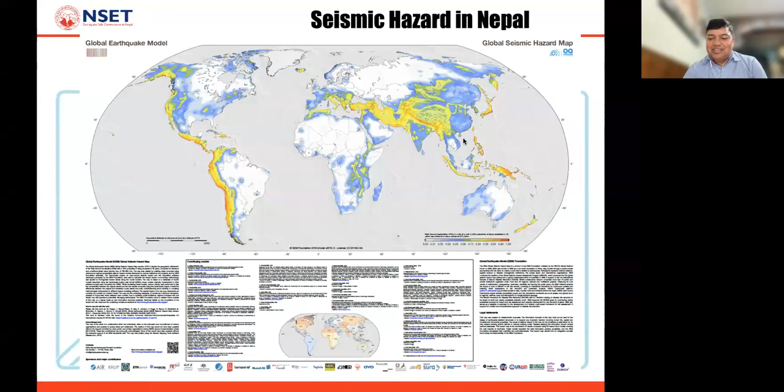We have our own seismic hazard map also, that's for most of the country. It's a 10% probability of exceedance in 50 years, about 0.4 G for most of the urbanized area. So that's the seismic hazard in Nepal.

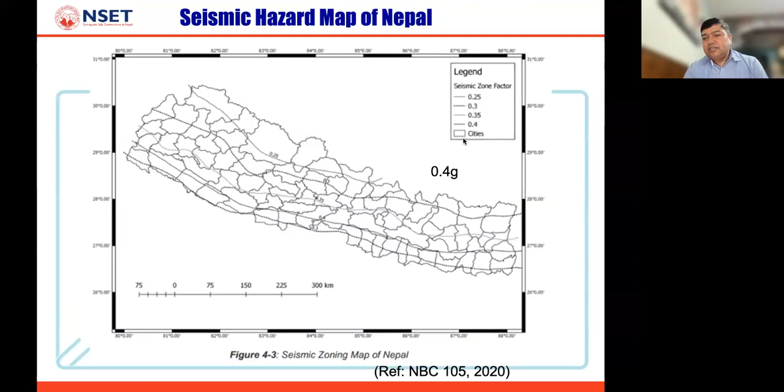This is also a known fact that globally during earthquakes, most of the people get killed because of buildings collapsing. This is the global scenario from the Earthquake Protection Handbook. Out of about 1.4 million fatalities, about 900,000 people were killed just because of masonry buildings. If we combine all other buildings, then it comes up to more than 80% of the people killed, and that's even more in developing countries.

For example, in the Gorkha earthquake, we thought almost similarly, that about 80% of the people may get killed because of building collapse, and the remaining about 20% may get killed because of lack of emergency response or others. But the reality we found was about 99% of people got killed because of either buildings or infrastructure collapse, and it's mostly the buildings.

And these data of 1.4 million do not include the Bhuj earthquake, Kashmir earthquake, Iran or Gorkha earthquake - the new earthquakes after 2000. But still, if we sum up all this, the ratio becomes even more, because most people are still getting killed because of the collapse of masonry buildings or other buildings.

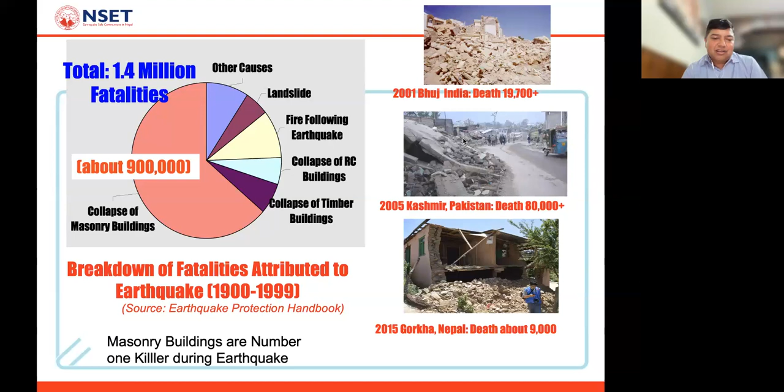So in that context, in Nepal, from NSET's side, we are working in all three streams actually. One is, and the easiest one, to make all new buildings earthquake resistant. That's the most easiest one, and the cost effective one.

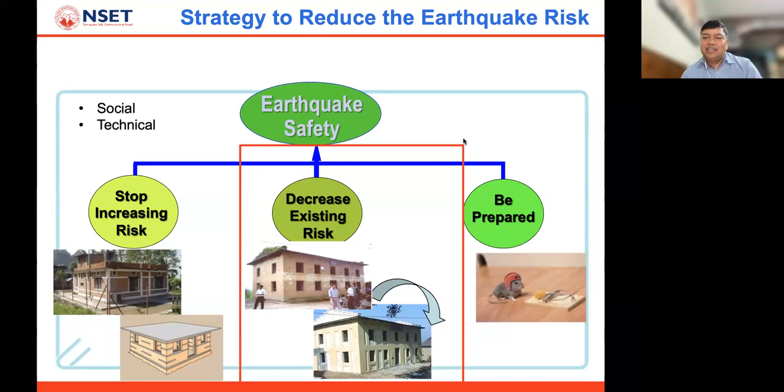We do have programs to support building code implementation, many awareness-raising programs and others for making new buildings safer. But we already have so many millions of existing buildings, and most of them are vulnerable.

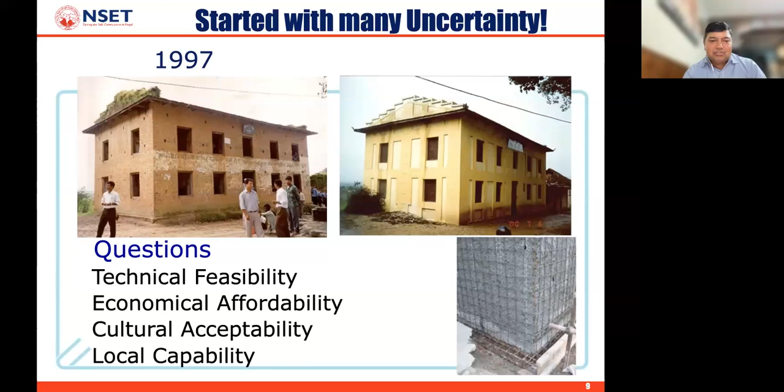So there were many questions for us, and we started with this simple school. We found some literature, some methods, and tried that. Perhaps we did slightly more than what was required at that time. But we tried, as you can see in the right, left corner of the building, a simple micro-concreting with some small rebar mesh. That's the type of retrofit we chose, and we did this retrofitting work.

And then during the retrofitting process, because this was new in our communities, the working masons asked, okay, why are we doing this? This is for the existing building, and you are breaking some part, adding some elements - what's the reason? We thought that without helping them understand why we're doing this, they will not do it properly. Only telling them to do this or that work may not help.

So we started training local craftspersons, the masons, even in retrofit and earthquake-resistant construction and others. This masons training that started from this retrofitting program became so famous that we developed a curricula. After the 2015 Gorkha earthquake, about 70,000 masons were trained, not only by NSET but by all organizations, based on the curricula that we developed.

And this came from these questions from the masons originally when we were retrofitting. When they were convinced, they thought they knew the technique and understood its importance, but they felt: why don't we from NSET convince the parents about the importance of retrofitting, so that they can support and help, because they know the technique.

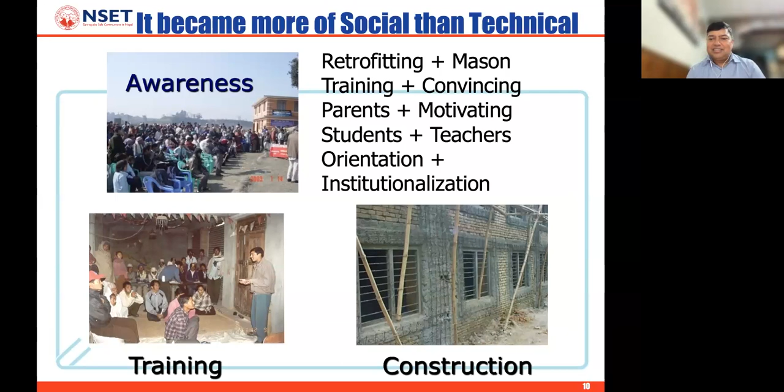And this is how we started our retrofitting work in Nepal. It became a comprehensive program with good stakeholder engagement, primarily three parts: awareness raising, knowledge sharing and training, and then the construction part. So this is how it started.

Before the Gorkha earthquake, we had retrofitted about 260 school buildings throughout Nepal with different fundings, raised from organizations like USAID, UNICEF, Plan, and other NGOs. NSET was directly involved in retrofitting these 260 school buildings prior to the Gorkha earthquake, and many of those buildings were in the highly earthquake-affected area around Kathmandu.

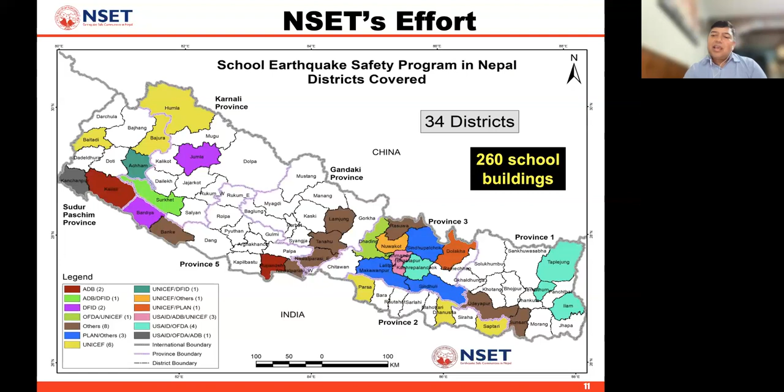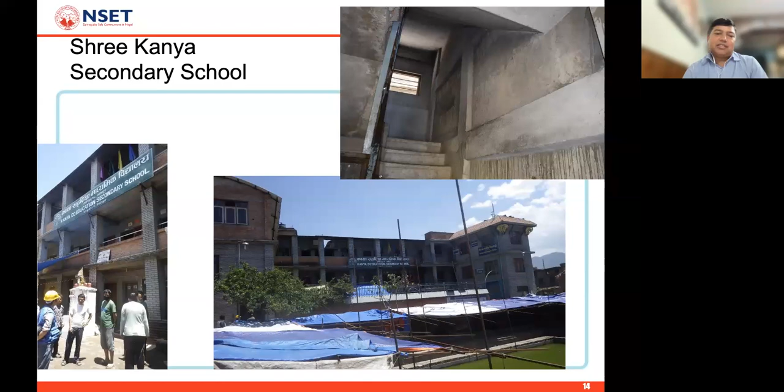Some of these schools were even still under retrofitting during 2015. We had a program at that time to retrofit 50 schools a year with the Department of Education, and while we were retrofitting, the earthquake happened. Some schools were near finishing retrofit, and they still performed quite well even with unfinished work.

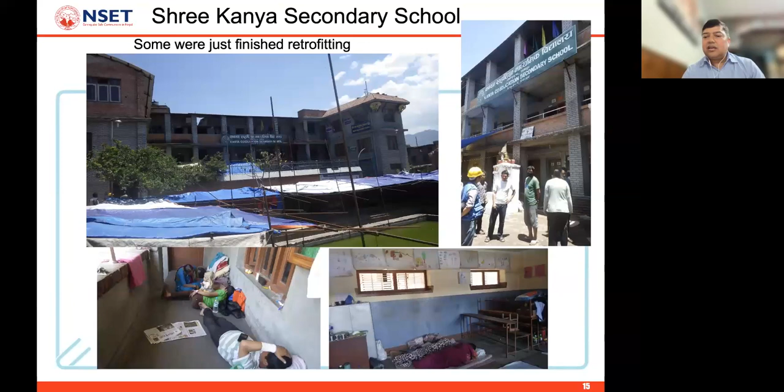In our approach we engage communities from the beginning to raise awareness, and we knew there were many better or even more resilient residential buildings in the communities, but none of the communities had trust in their own buildings. They came to the schools because they were meant for earthquake safety and had been retrofitted, so people had more faith in them and stayed there for some time. We knew their own houses might have sometimes been even better, but still they trusted the schools more because of this community-based engagement approach.

The first school we retrofitted, the one I showed earlier, was also our starting point. We went to see that school again, and since it had already been 18 years since implementation when the earthquake hit, nothing happened - no cracks, the school was perfect. We visited all of those retrofitted schools, mostly 2 to 3 stories, and you can see different schools in different colors, but all performed very well.

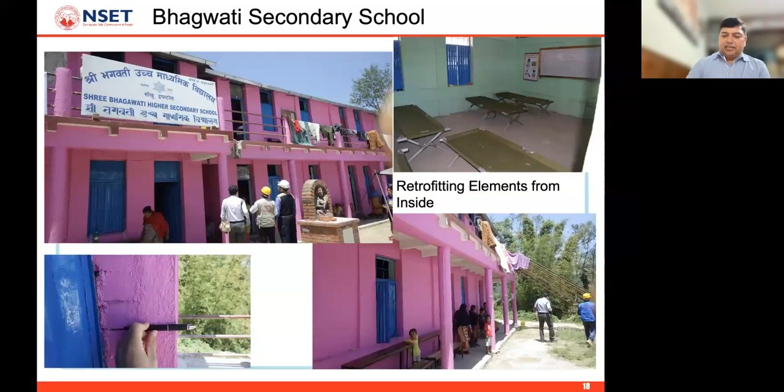That's the point - there are some cases where we did not retrofit all the school blocks of the same school, because we had limited buildings to retrofit. So there are many cases where the retrofitted buildings did not even get cracked, while others which were not retrofitted - sometimes even reinforced concrete buildings with small concrete columns - completely collapsed or were severely damaged, even within the same compound. This is one example in the north of Kathmandu Valley, Bhagyodaya School.

On the left side, you can see the pink block - it's actually a U-shaped block, quite large, a brick and mud building that we retrofitted prior to the earthquake, and it sustained quite well, with no cracks, and was used as an emergency shelter after the earthquake. On the right side, you see the same pink block again, and another block, 4 stories, a reinforced concrete school building, a larger block, that was severely damaged and needed to be demolished and reconstructed.

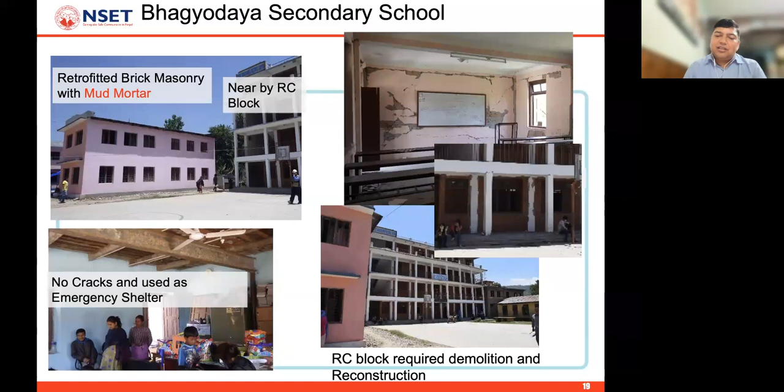All the retrofitted school buildings performed well, but more than 6,000 schools collapsed in the 2015 earthquake in the same area. So that shows very clearly the retrofitting worked very well.

The retrofitting techniques we use are simple retrofitting techniques. The first one is what we call splint and bandage. We coined this name from medical terminology. The splints are the vertical elements - when a hand is fractured, you put the splint, and then the bandage. So to have similar terminology, we term this splint and bandage, and in our guidelines and standards, this terminology is now used.

It just means you have vertical and horizontal elements - horizontal and vertical bands from outside and inside of the building walls, connected together. On the left you can see the rebars going in, and on the right we use micro concrete and plaster after that. So these are the horizontal and vertical bands connected from inside and outside - this is what we call splint and bandage.

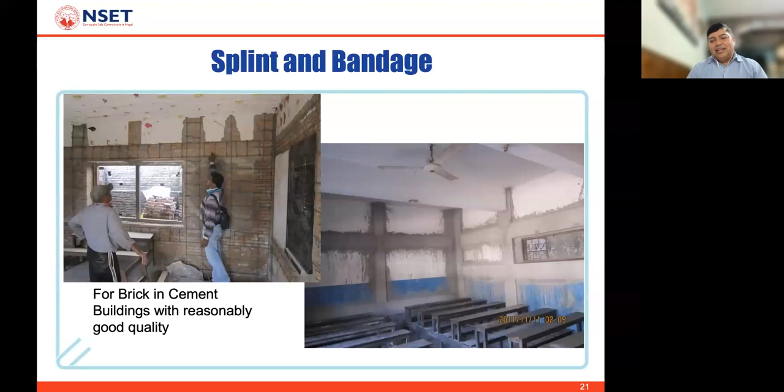This type of retrofitting technique we use for many schools which are cement-based, up to 2 stories mostly, and in relatively good quality condition. For other schools which are relatively bad quality masonry work, or 3 stories - depending again on our calculation as an engineer, depending on the demand - the other retrofitting technique we used was complete jacketing of the walls, again with reinforcement and micro concrete.

We generally use manual shotcreting, simple. The concrete is designed mostly for cover, and also very little shear - most of the requirement is fulfilled by the reinforcement we put. So this is how we design and implement reinforced concrete jacketing - a thin layer of concrete with reinforcement.

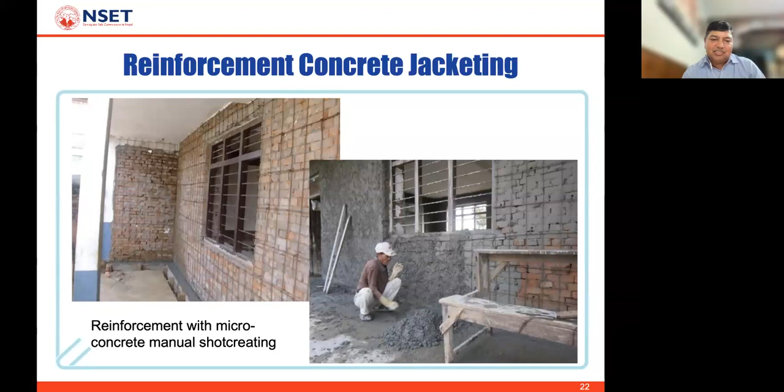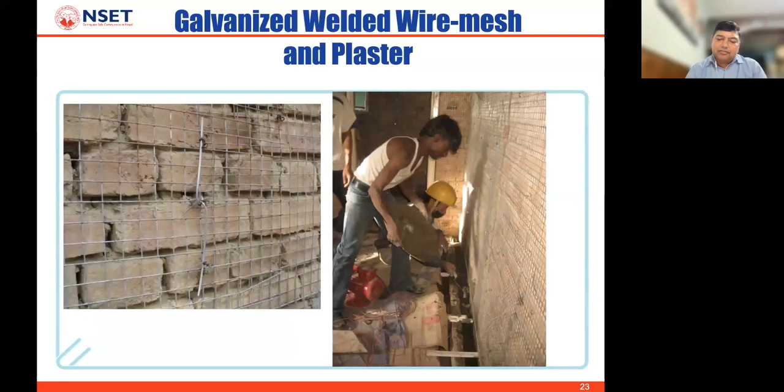In some cases, considering the space and to implement it fast, especially in residential buildings, we use welded galvanized wire mesh, so we don't need a thicker concrete layer - this thin plaster will work, and being galvanized, there's minimal problem of rusting. We used this in many buildings to retrofit, including some schools and mostly residential buildings.

We used polypropylene mesh jacketing also, especially for 1-story small mud-based adobe or brick and mud buildings. That's based on research at the University of Tokyo, which we did in 2008, 2009 in some buildings, and they also performed quite well in 2015.

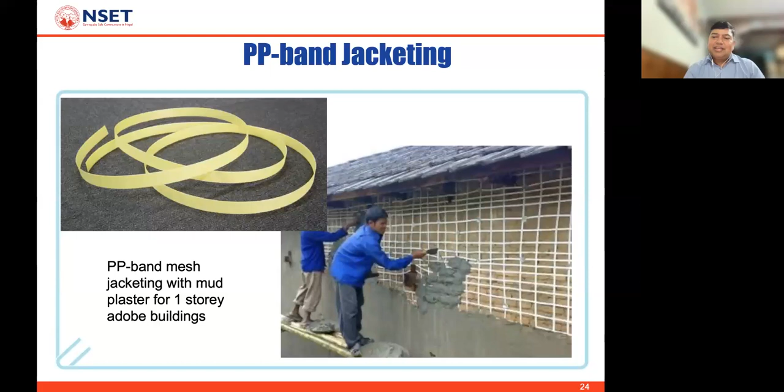The PP band is the material generally used for packing, and we prepare the mesh from it. Sunlight affects this material a lot because it's plastic-based, so we have to cover it. But if there's proper coverage, it's good because it doesn't get damaged by water. So it's a good material - very light, very cheap - and we use it in some buildings too.

We have combinations as well. We use this material because it's cheap and light, alongside splint and bandage. But in some cases it's not enough, especially to prevent local failure, so we have other methods of mixing these. In critical locations - above the window or at lintel level or sill level, corners, near doors, those high stress or stress concentration places - we put slightly stronger material similar to splint and bandage, and in all remaining places we use the polypropylene band.

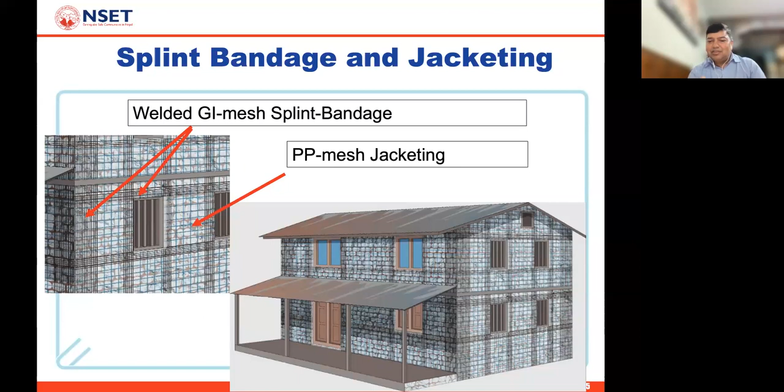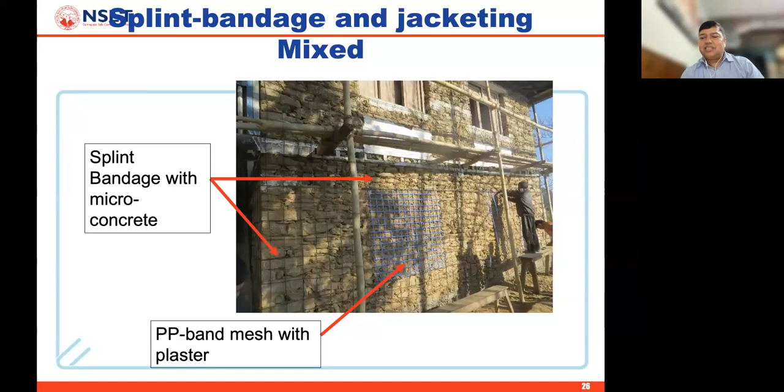We've done this, for example, as you can see in the picture - in areas with less stress concentration, you can use low strength materials. In some cases we even have welded strong mesh near openings or corners, and in other cases widely spaced GI wires instead of the PP band.

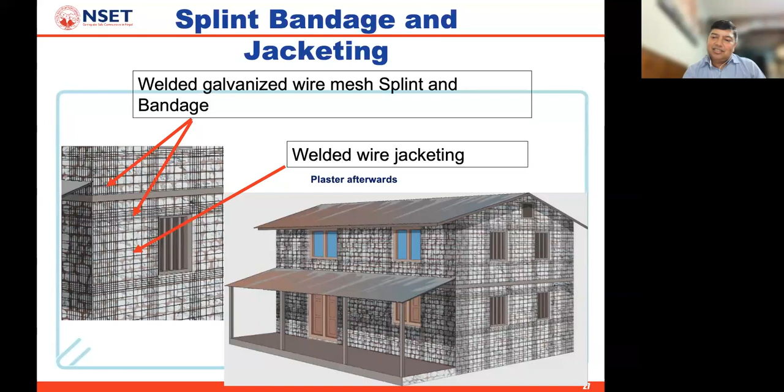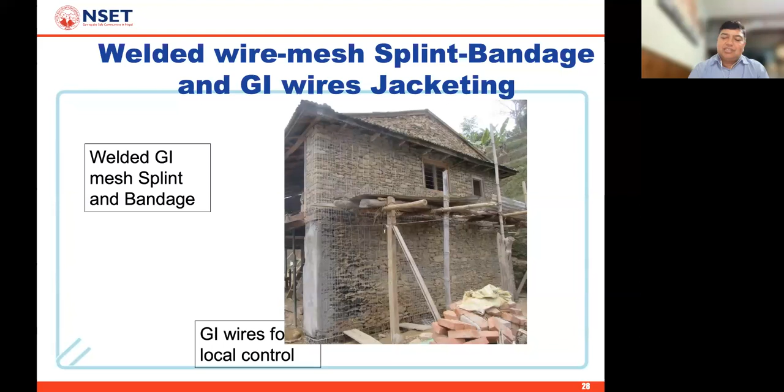So we have different combinations of jacketing and these methods. For example, here you can see just below the window, at the corners and the middle part, the closed mesh - stronger welded wire mesh - and in other areas the wider spaced GI wires. So we have a combination of these methods as well.

So these are the retrofitting techniques that we used. In terms of the research, we have both the experiments as well as the numerical simulations. Our research has been done mostly in collaboration with universities in Nepal and outside Nepal. NSET is not a completely research organization, so we are more implementation oriented, but we work as a very strong link between the research and the implementation.

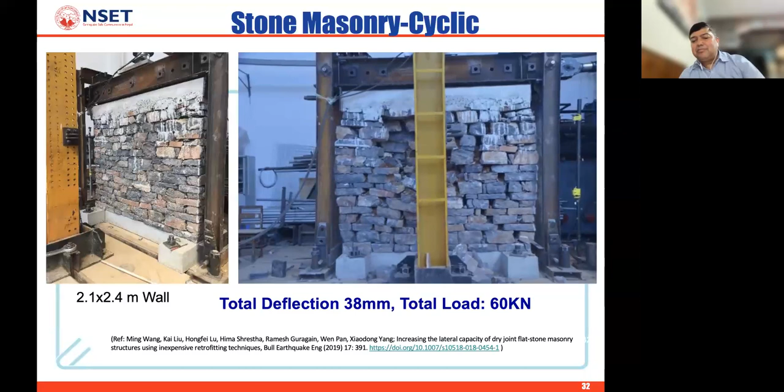In the non-retrofitted case, the total deflection was a maximum of 38 millimeters, and the total maximum peak load was 60 kilonewtons, for a relatively good, well-laid stone wall. In the retrofitted case, the deflection was 185, and the load was 147, so almost 5 times more deflection capacity and at least 2.5 times more load resisting capacity. So it's quite significant safety improvement.

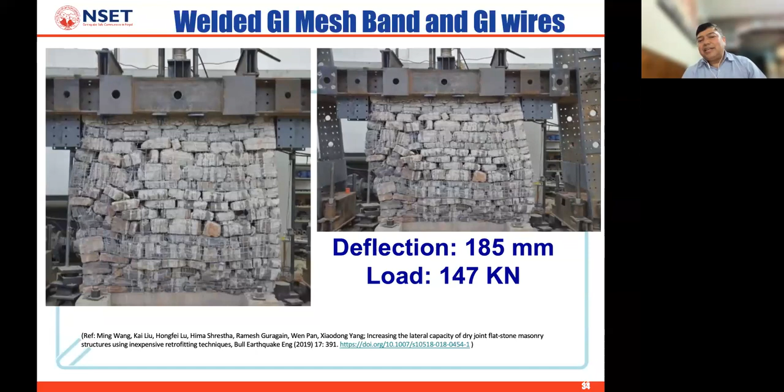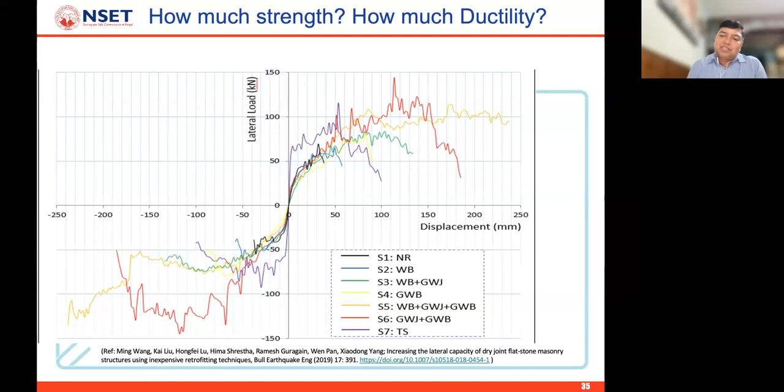But these are still at the element level. Later on, these are the comparisons you can see here. The black line is the non-retrofitted one, and the red one is the highest performance one, with the galvanized wire mesh jacketing. After the element level tests, we also conducted shake table tests for almost full scale buildings, about two-thirds scale.

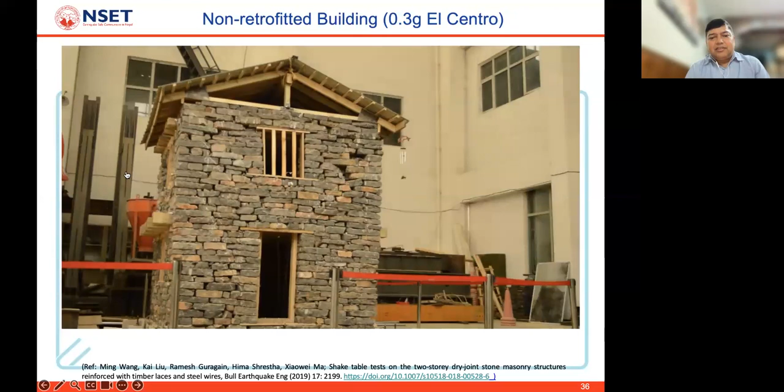It was a 0.3G El Centro test, and the non-retrofitted building collapsed at that stage, so we stopped further testing of that block. Then we had another building, starting from 0.05, 0.1, 0.15, 0.2 G, and we continued that test up to 1G, which was the maximum capacity of the shake table.

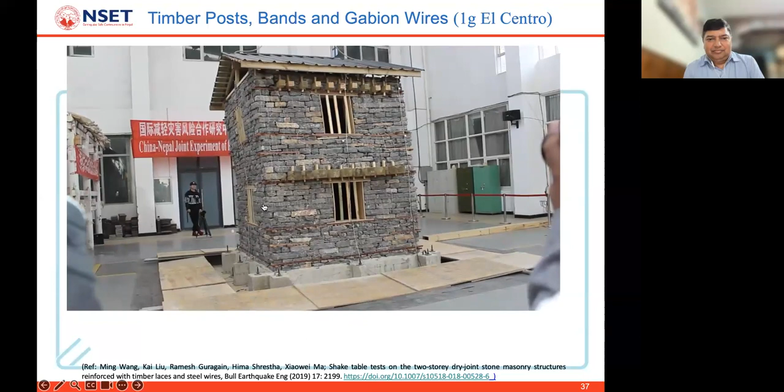We could test up to 0.8G, and at 1G we could not even completely test because the shake table stopped. But going from 0.1G up to 0.8G and even close to 1G was quite significant, and there were some deflections of the building. You can see even the shape changed, but none of the stones fell down, and the building remained intact even at that level, almost 3 times better in comparison to the non-retrofitted building.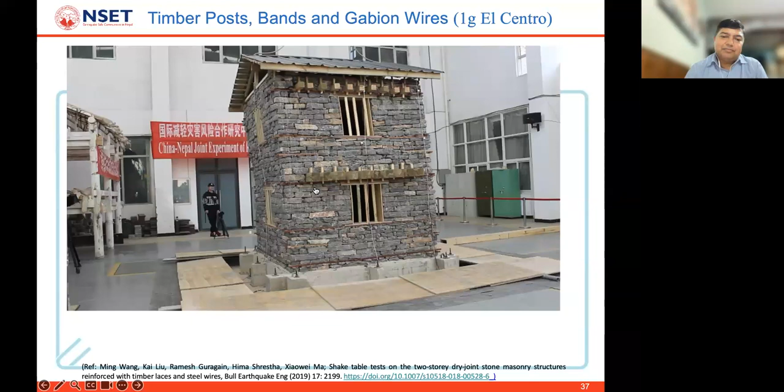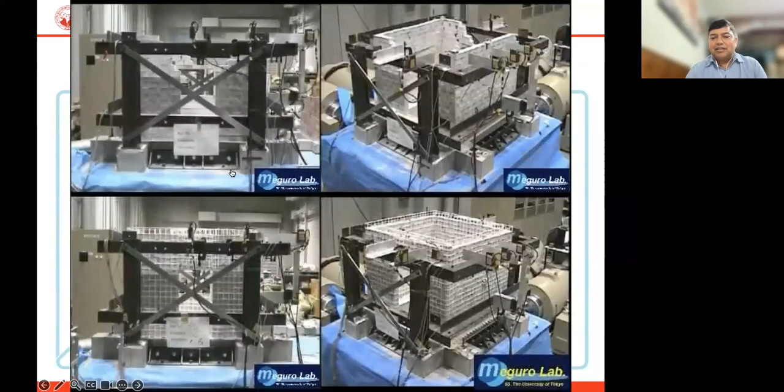So that's the type of research we got involved in, based on the real problems we were facing and the type of retrofitting techniques we use here in Nepal, and at least some of them we tested. For the PP band retrofitting technique, it's mostly University of Tokyo work - I graduated from there, and it was part of my master's and also some of my PhD work.

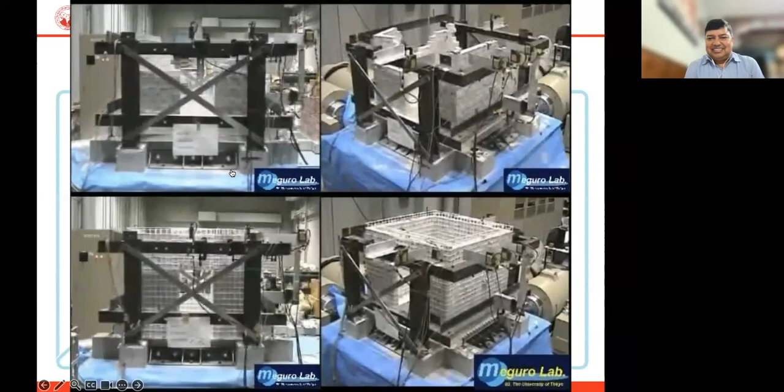This is still a small scale, 1:4 scale test, just for comparison, and more for numerical purposes - to develop the numerical simulations and verify the numerical work. So those tests are used for that purpose.

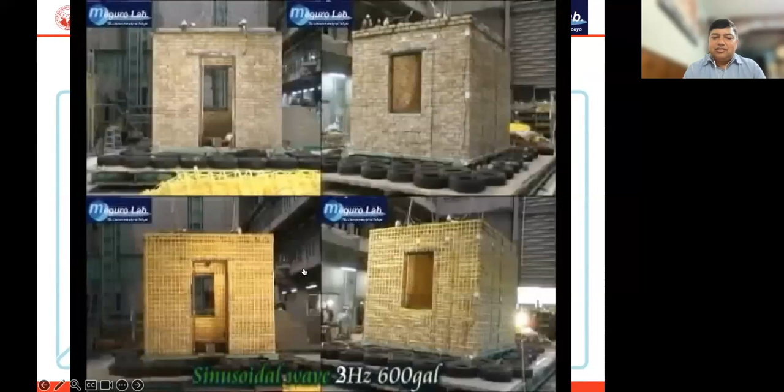But at the same time, we have full scale shake table tests also - you can see here it was a sinusoidal wave, 3 hertz, 600 gal, retrofitted by polypropylene band. It's just a 1-story full scale model.

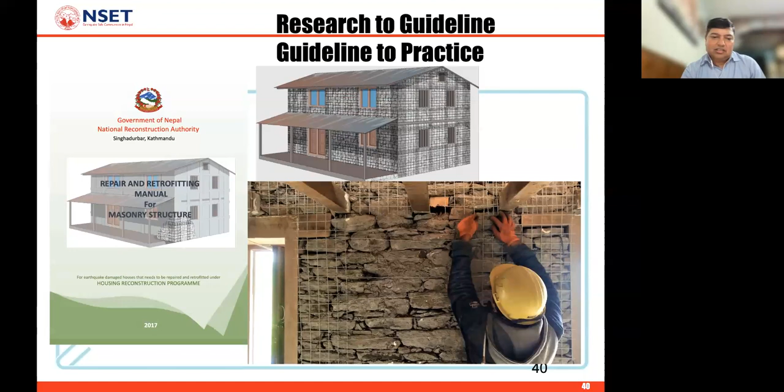That's the level of work we've been doing in that line. In terms of stakeholder engagement, that's again very critical. Without proper engagement, it's very difficult to promote retrofit, and it requires a lot of information because there are so many stakeholders. They actually influence the house owner, who is at the core of deciding on retrofit, for example in residential buildings. Friends and family are the nearest influence for any decision making, including retrofit.

We have local masons, because they generally support construction of houses in most parts of the country. We have engineers and consultants, vendors, material producers, academic and research institutions to do the research. We have local governments, local communities, and municipal engineers as another group that influences this. We have the central and provincial governments to formulate guidelines and policies. We have other partner organizations, donors for funding, CSOs and CBOs for advocacy, and others. We also have media playing a role. So there are many stakeholders who are involved and whose involvement is required to promote retrofit.

That's why we need a very comprehensive program to include all of them, so the concept can move forward. Especially for any new concept in society, we have to get all these players or stakeholders involved. We learned this from our building code implementation program earlier — considering all these stakeholders, we ultimately identified three types, or three actions required.

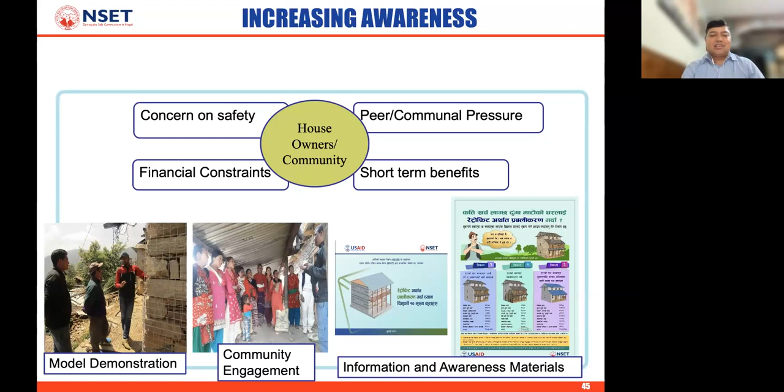For capacity strengthening for the masons and contractors, again we have to give hands-on training.

For retrofit, what we found was combining discussions in classes at a more conceptual level, explaining why it's so important to do it that way, together with on-site help so they understand what to do and how to do it. Both of these are very important.

Unless they do it, they don't know what to do. But if we just focus on what to do only on-site, they may not know the reason why we are doing this. Unless they know the answer for why we're doing it this way, they may forget, and next time there's a huge chance they'll make a mistake.

So for engineers and for masons too, we combined theoretical trainings with field observations, on-site hands-on exercises and skills.

Our retrofitting training for masons goes for almost a month, starting from a whole building's foundation to roof. It's part of the real retrofit work, complemented by theoretical sessions, classroom discussions, problem sharing and others, so they know the skills and also know the reasons why we do it that way.

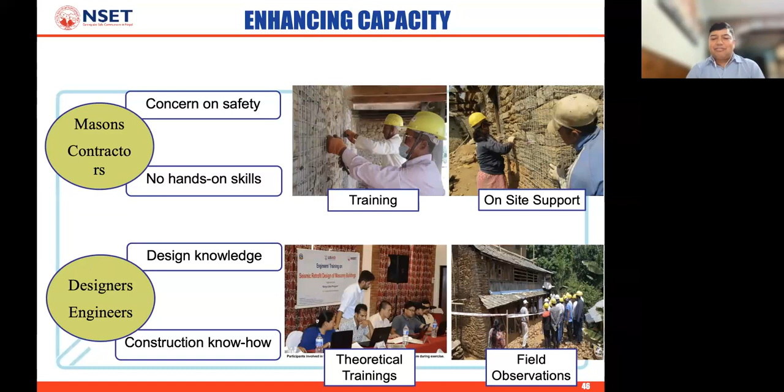For engineers, there's a slightly heavier part on discussions, the design process, and seismic retrofit design of masonry buildings and similar topics. But at the same time, field observations were really important to build confidence.

For institutionalization, we had to have guidelines. They are very important, consensus guidelines mostly, and it required a lot of workshops, discussions, and again demonstrations.

Combining all these activities, we could come up with national level guidelines and manuals, but at the same time put an institutional process in place for how they will give the permit for retrofit and who will check the quality of those works and others.

So this is how we did stakeholder engagement for the three different streams of stakeholders.

Now let's come to the cost of retrofitting. Again it depends on which retrofitting technique we use. For this welded galvanized iron mesh and GI wire jacketing type of work, it's Nepali rupees 450 to 500 per square feet. That's how much - 130 Nepali rupees is $1.

So that's $4 or $5 per square feet of the plinth area. Starting from that, for a 200 square feet one-story small house, it costs about 850 US dollars, and bigger ones around 1400 plus 50.

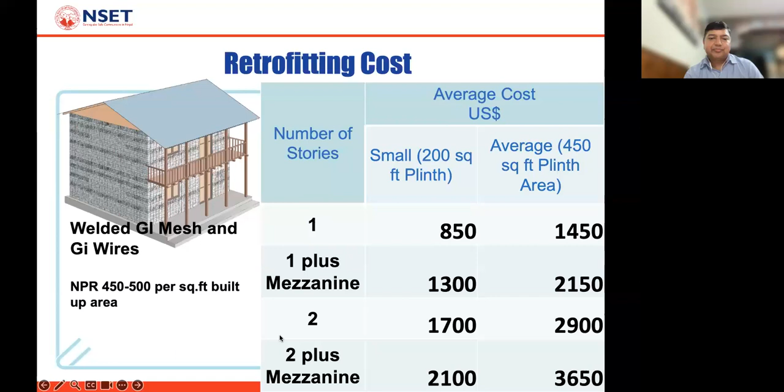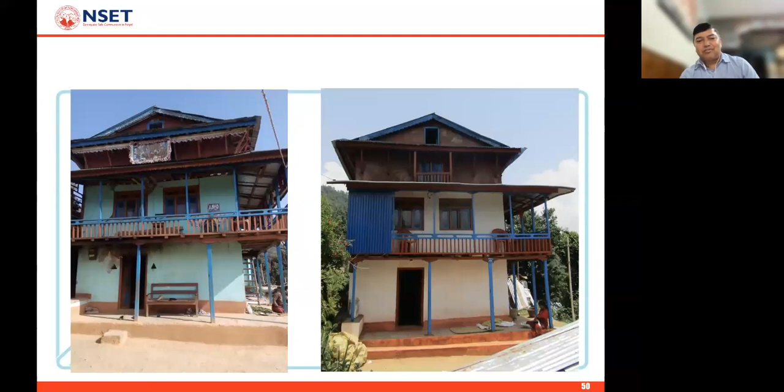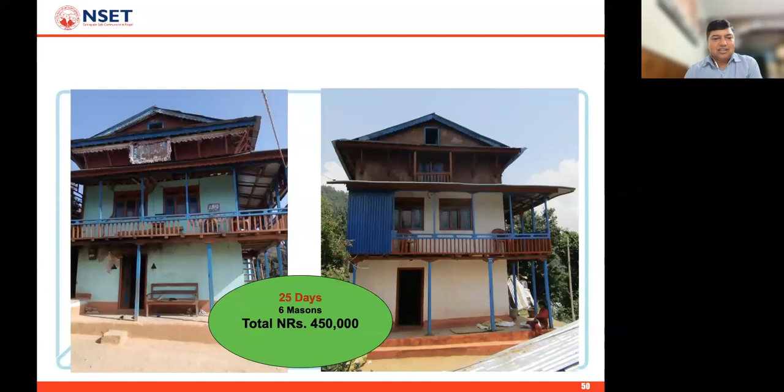This is an average of those 100 plus buildings that we retrofitted, using today's cost rate. For example, this is a real building we retrofitted — on the left before retrofit, right after retrofit. For this one, it cost about 450,000 Nepali rupees, which divided by 130 is about 4,000 US dollars.

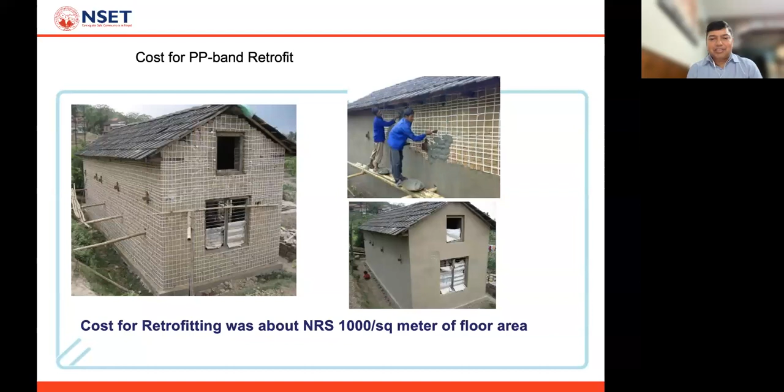The PP band is much cheaper, about 1,000 per square meter, meaning 100 per square foot, less than $1 per square foot of plinth area. The material itself costs less than $100 total for this type of building. That's the cost for the PP band retrofit.

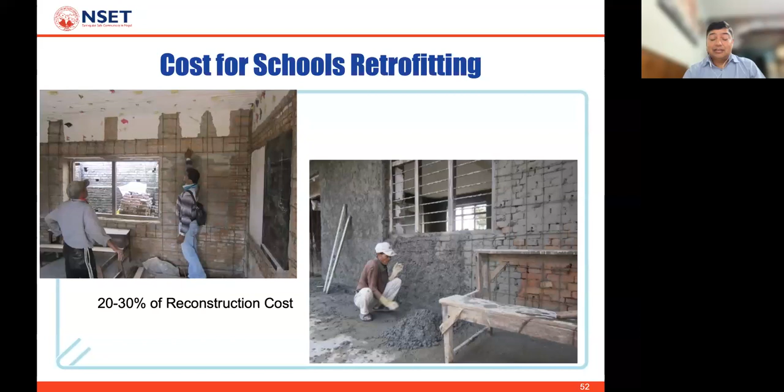It's very economic. For school buildings, retrofitting requires slightly more materials to be on the safer side, and their performance requirement is much higher than residential buildings. But in all cases, retrofitting costs in our experience were 20 to 30% of the reconstruction cost — that's the tentative idea of retrofitting costs for the methods we use.

Now, financing and incentives are very critical and important — the success of moving retrofitting forward depends on these. In our case, for schools, we started from very small numbers as a demonstration — just one school first, because you don't need a large amount of funding to start. The next year it was 4 schools, then 10, then 15 — we kept building up from there.

It took several years for larger funding organizations and federal level authorities to get convinced of the idea, by which point we also had sufficient experience doing this. Once the Department of Education took the leadership, recognizing the importance and viability of retrofitting, we had hundreds of schools retrofitted at once.

They took funding from a basket of multiple donors — an education fund — and from that fund we started retrofitting. Even now, about 141 schools, roughly 1,000 school buildings, are under retrofitting. The importance was realized after the 2015 Gorkha earthquake, and it's much easier now compared to before. For public buildings, including schools, 100% of the funding comes from the program itself.

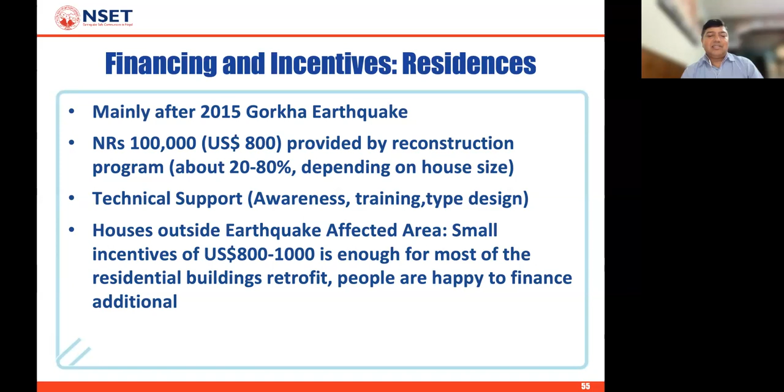In our estimates, for a massive retrofitting program, this is the budget the government would provide, with individuals paying the remaining amount, making retrofitting possible. We implemented about 10 buildings last year with this scheme, and there is such huge demand from the community that everybody wants to do it if this level of support is available. We found incentives to be very important and critical to motivate residents to retrofit, but it's not a huge cost per building.

The challenges: scaling up is a really huge challenge.

We have sufficient cases, so many schools retrofitted, 400-500 schools now, plus residences, and different retrofitting techniques. We have masons and engineers trained, quite many successful small cases, but the scale is so big.

I did some calculation. For example, the previous census showed we had total 5.5 million houses in Nepal. About 800,000 was rebuilt after the Gorkha earthquake, and 10 to 20% of buildings might be resilient and may not need immediate retrofit.

But still, we have to retrofit about 3.5 to 4 million houses, and that's a huge task ahead. So whatever successful cases we've done so far, small scale, is still so small compared to the larger, massive whole-nation retrofit program. Reaching this bigger scale is really a big challenge.

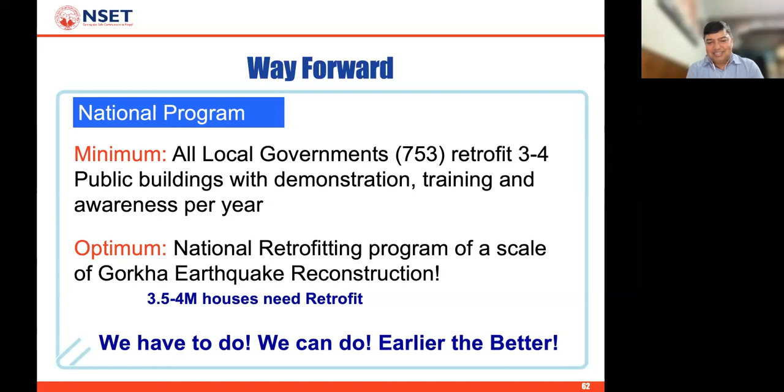The optimum program is to have at least a Gorkha reconstruction level program that supports retrofitting about 4 million houses. In our experience, we have to do it, and we can do it, and we think we have to do it as soon as possible.

So these are all the points that I wanted to share with you. If you would like to know any of the details, I'll be very happy to do that. Thank you so much.

Thank you very much, Ramesh, for a very interesting and very comprehensive presentation. I was very impressed by the fact that you started with stakeholder support in order to start the program that NSET had in mind, and that you concluded with the need for more stakeholder support in order to continue to implement strengthening and retrofitting at a national level. It is indeed essential that governments take on such programs, because we are not able to sustainably rebuild the building stock in any country in a timely and economic manner.

It is very interesting that there were questions for you just after the second slide. So you'll have a long way there, and I will start with the first one. Let me just open it up.